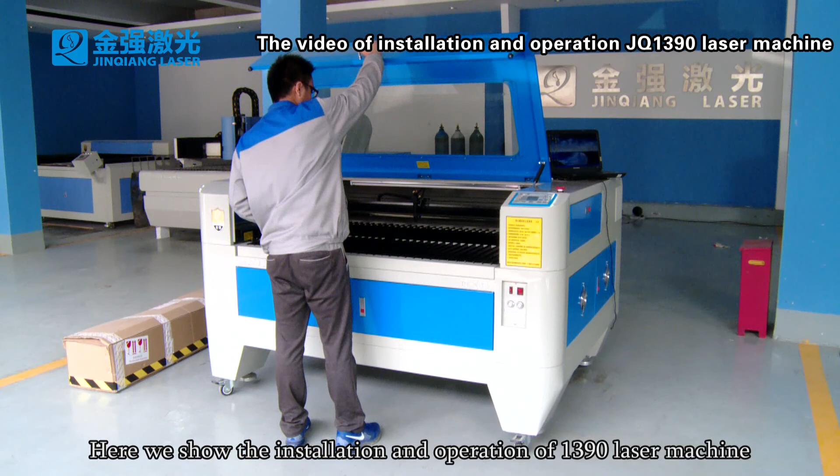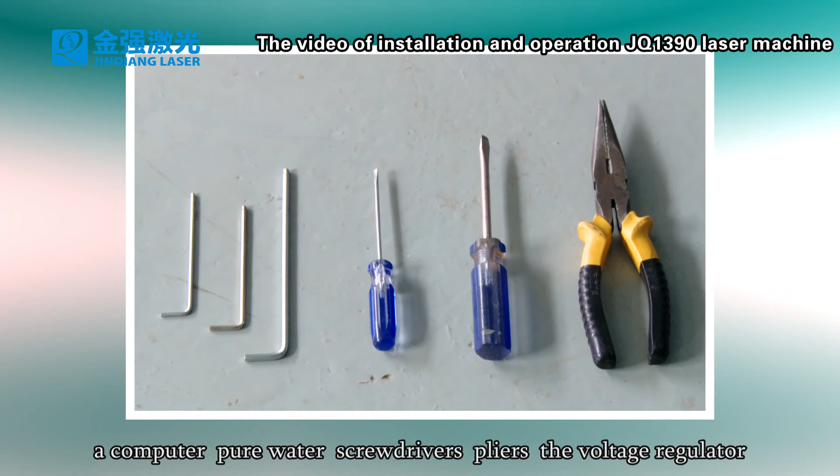1. Preparations before installation. Here we show the installation and operation of the 1390 laser machine. Before installation, we should prepare 220 volt, 110 volt power supply, a computer, pure water, screwdrivers, pliers, and the voltage regulator, in case the voltage is unstable or laser power is higher than 150 watt, suggest equipped.

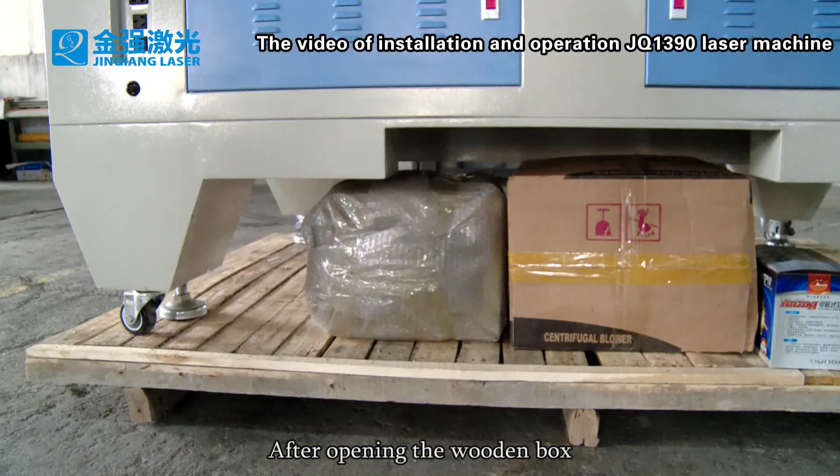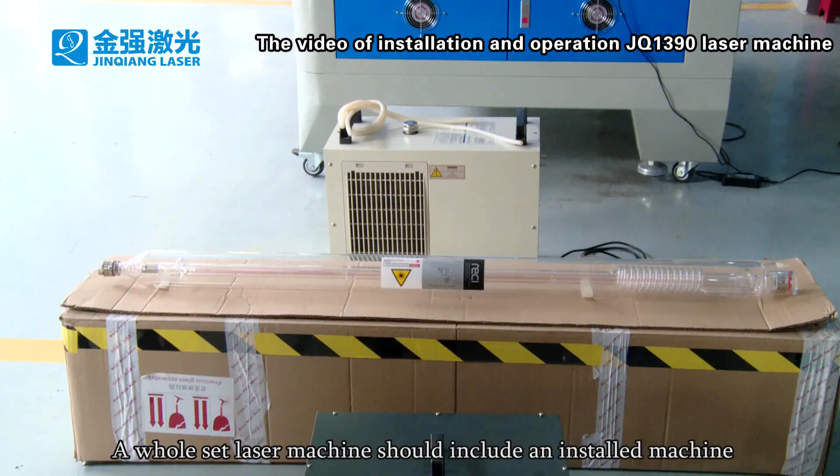2. Open the package and verify the machine accessories. Firstly, remove the outer wooden box, then tear down the machine's outside stretch film carefully. After opening the wooden box, find the related accessories and double check. A whole set laser machine should include an installed machine, laser tube, water chiller, air pumps, exhaust fans, toolbox, and file bag. After careful inspection, please contact our factory promptly if there is damage.

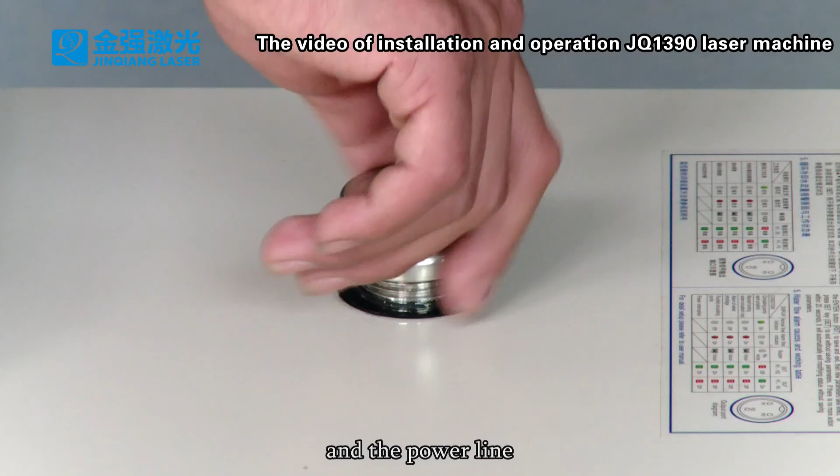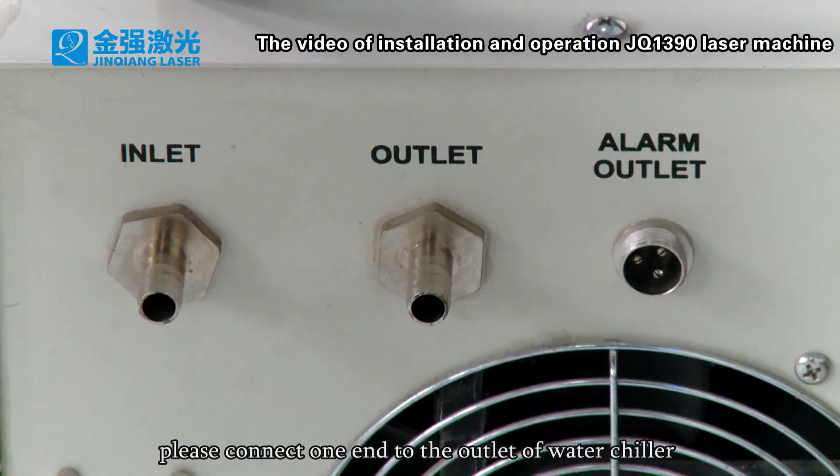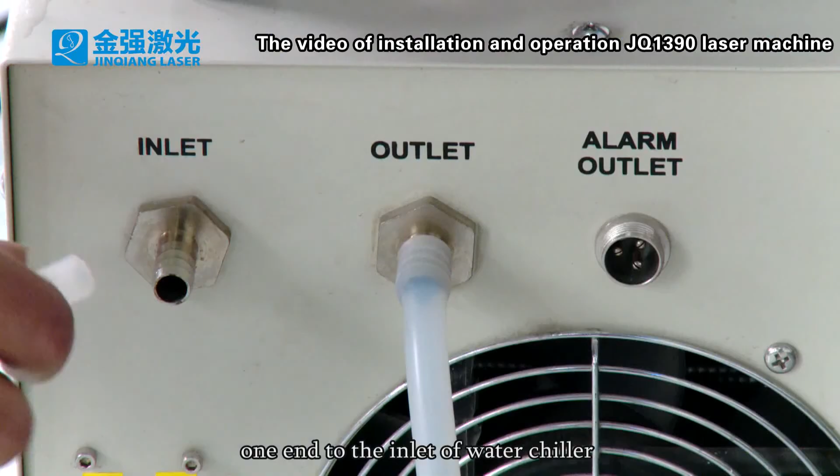3. Chiller installation. Firstly, find the water chiller, 2 water pipes, and the power line. Open the water injection cap of the water chiller to fill the pure water, then tighten the cap. Connect the water pipes: please connect one end to the outlet of water chiller and connect the other end to the inlet of machine. Then connect the other pipe, one end to the inlet of water chiller and the other end to outlet of the machine.

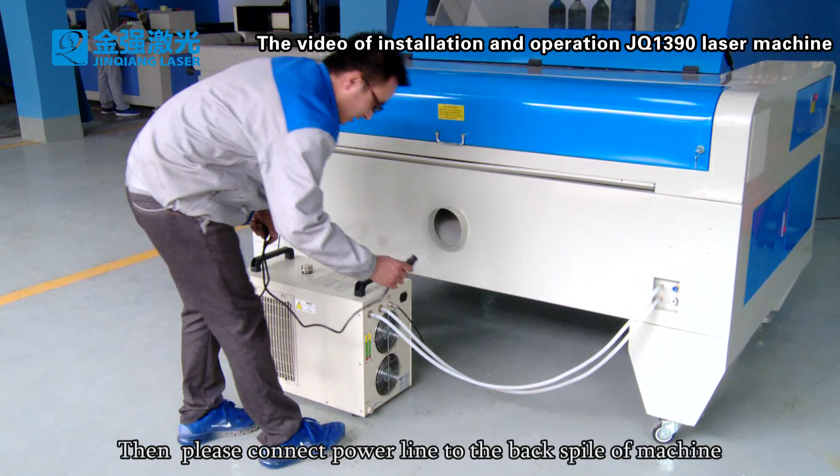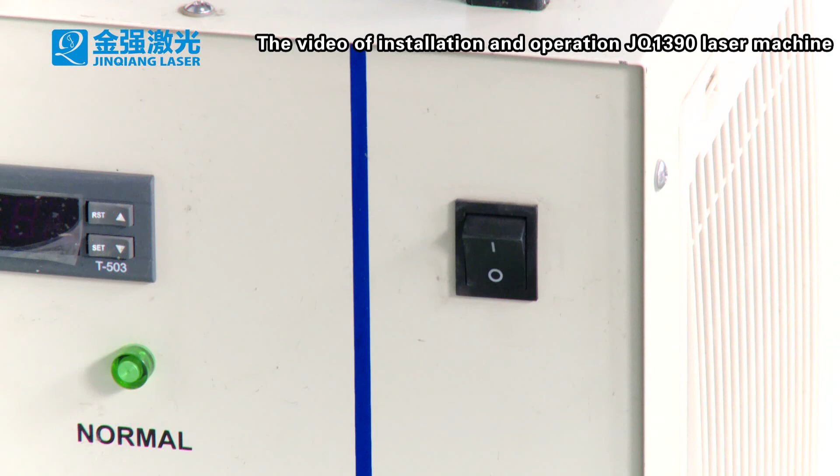Find the water protection line and put the right end to the connector of water chiller. Then please connect the power line to the back socket of machine. Make sure water chiller is off. Different machines use different water chillers; we also have the CW3000, CW6000 and others, all of them installed in the same way.

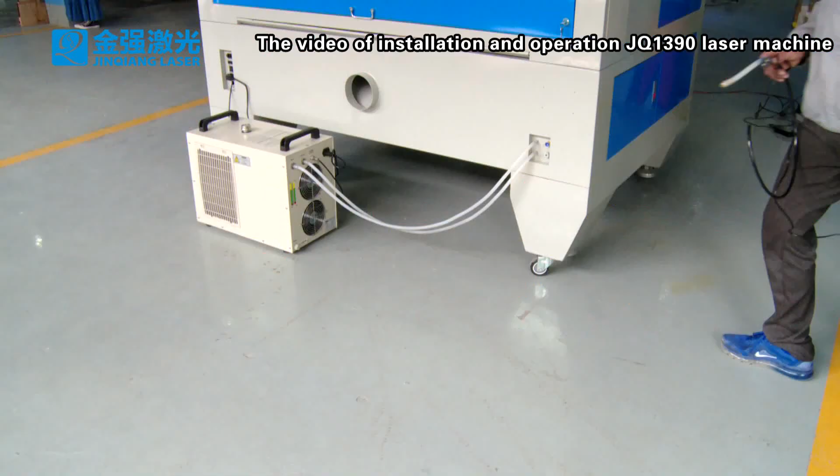4. Pump installation. Find the air pump, connect one end of air pipe to air pump and the other end to air inlet of machine. Then connect the power line of air pump to the back socket of machine.

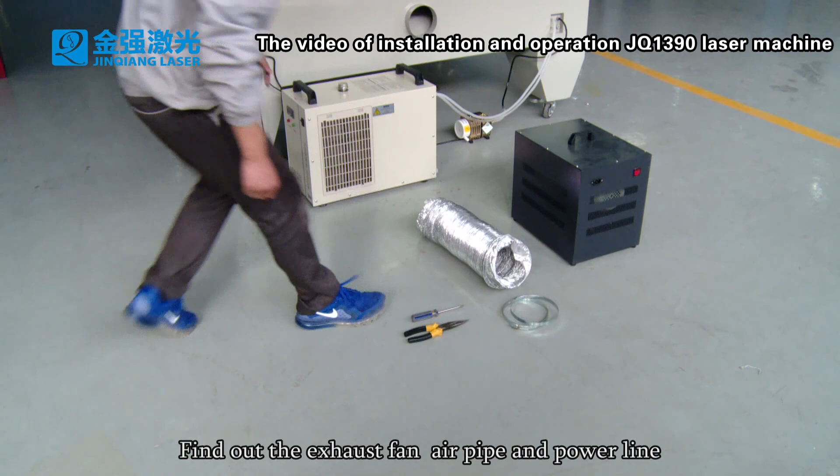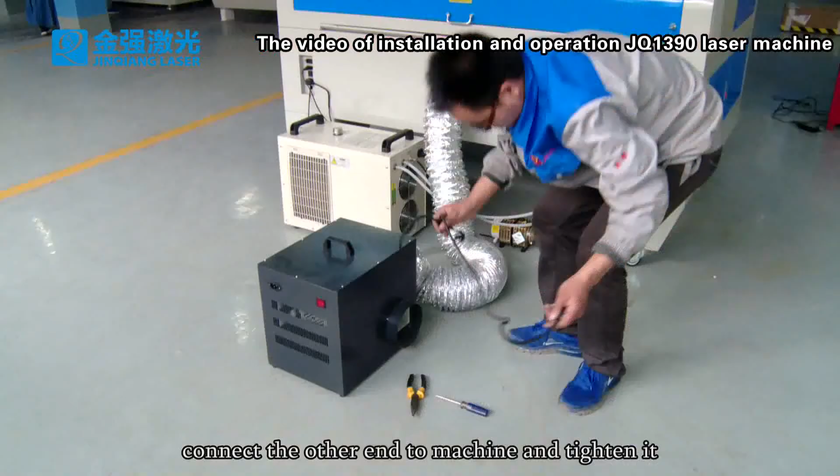5. Exhaust fan installation. Find the exhaust fan, air pipe and power line. Prepare pliers and a screwdriver with the plain end. When you get the air pipe and hoop, please clamp the hoop to the air pipe. Connect one end to the inlet of exhaust fan and tighten the hoop. Connect the other end to the machine and tighten it. Then connect the power line. Pay attention: please make sure the exhaust fan is closed after installation.

Different customers have different work tables. The connecting is as follows: blade work table, honeycomb work table, up-down work table.

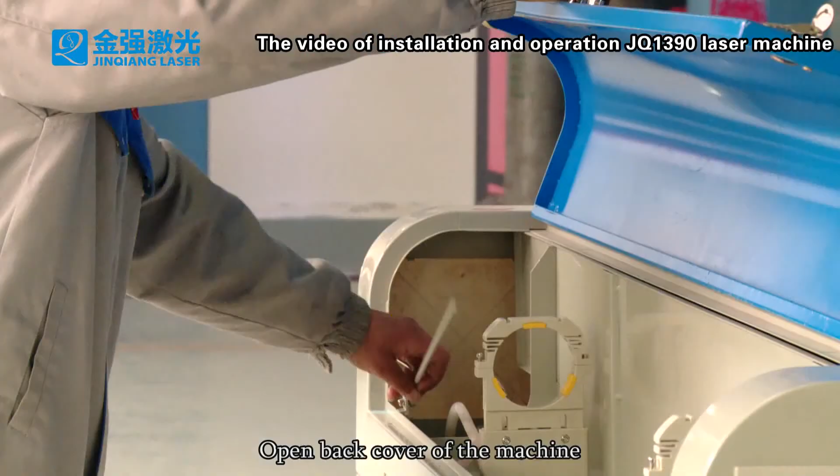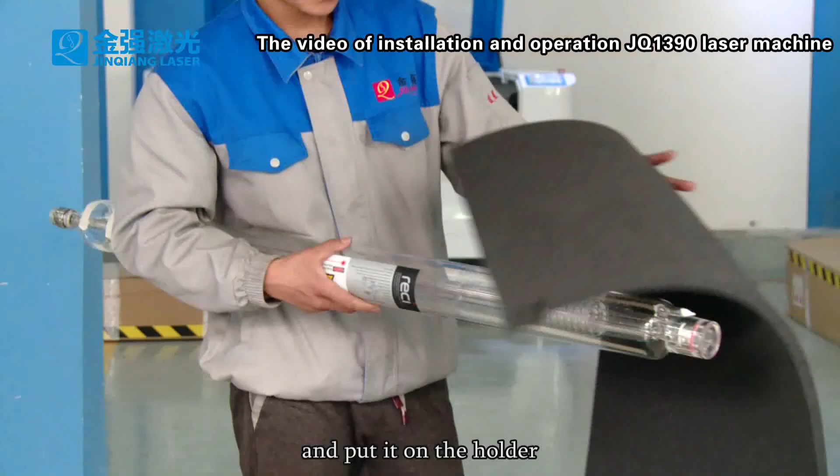6. Laser tube installation. Open the back cover of the machine and hold it up. Remove the screws on the laser tube holder. Take out the laser tube from the packing box and put it on the holder. During installation, we should ensure the distance between the laser outlet and the first reflecting mirror is 1 to 4 cm.

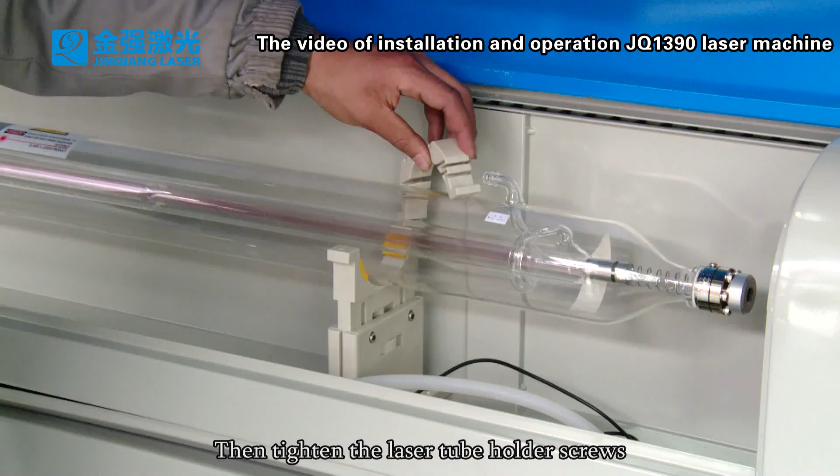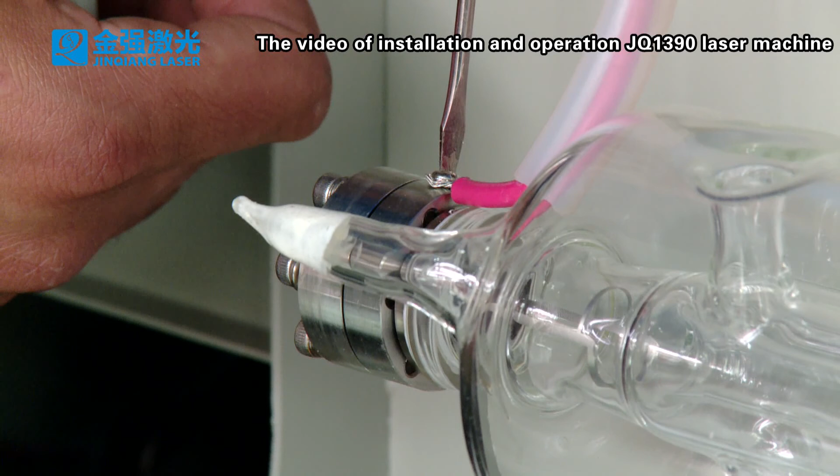The water outlet should be upturned. Then tighten the laser tube holder screws. Connect the laser tube inlet pipe and outlet pipe well. Take down the high voltage cap. Tighten the high voltage line and cover up the high voltage cap. Then connect the low voltage line and tighten again.

For other different models of laser tube, the installation is similar.

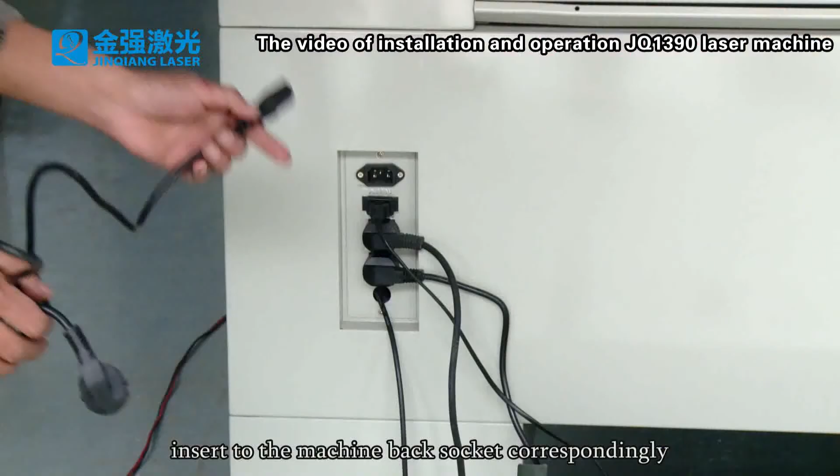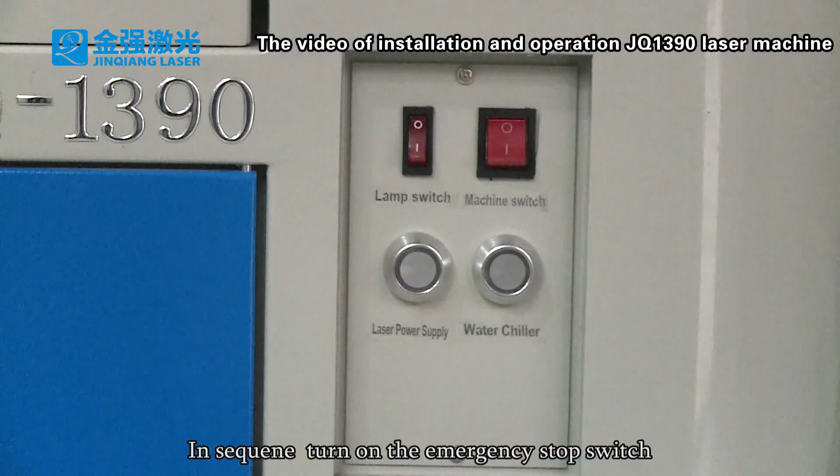7. Turn on the machine under precautions. Find the machine's power line and insert it to the machine's back socket correspondingly. Insert the power line plug into the power supply board to put through the power supply. In sequence, turn on the emergency stop switch, machine switch, and lamp switch.

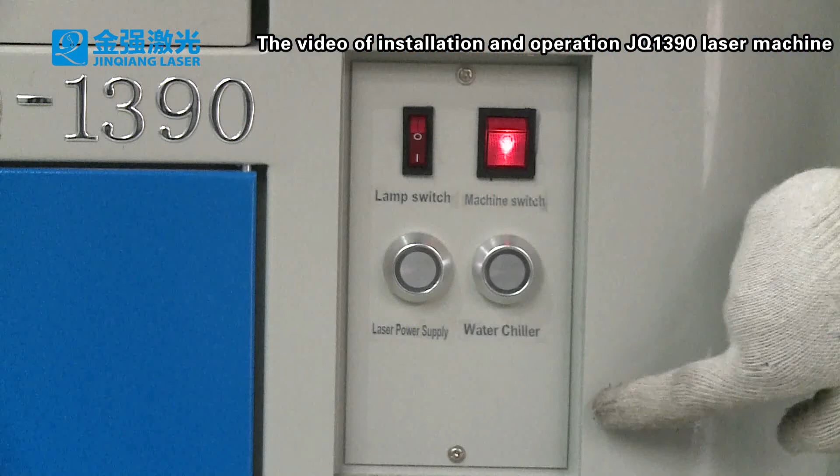Then turn on the water chiller switch. Open the laser tube's back cover to ensure water is circulating. When the laser tube is filled up with water, there will not be air bubbles inside. Finally, turn on the laser power supply switch.

8. The laser path adjustment. 1. Laser path adjustment requirements: the incident point of the laser on the reflect mirror locates within a 10 mm diameter range of the lens center. Approach the lens center as close as possible.

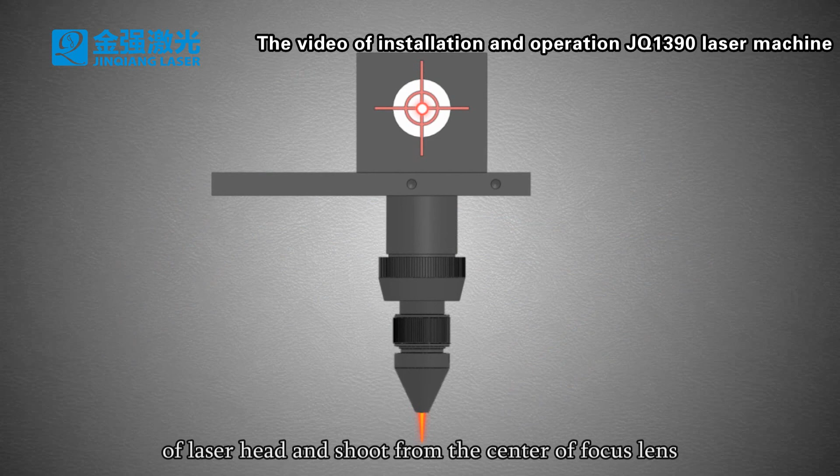2. When the laser head is on the 4 limit positions of the machine—top left corner, bottom left corner, bottom right corner, and top right corner—the laser beam can run into the round center of the laser head and shoot from the center of the focus lens.

Notice when adjusting laser path: don't put your body in the middle of the laser path to avoid laser burns.

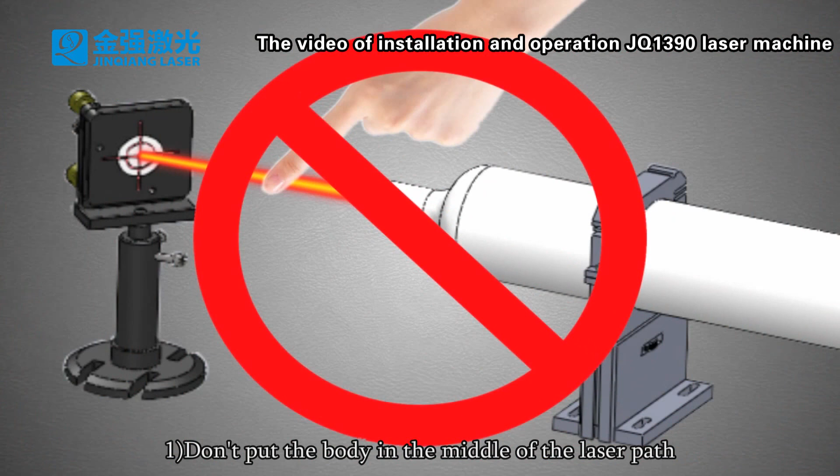Before adjustment, we must install the cooling water. It is forbidden to adjust the laser path when the cooling water is uninstalled or has poor circulation.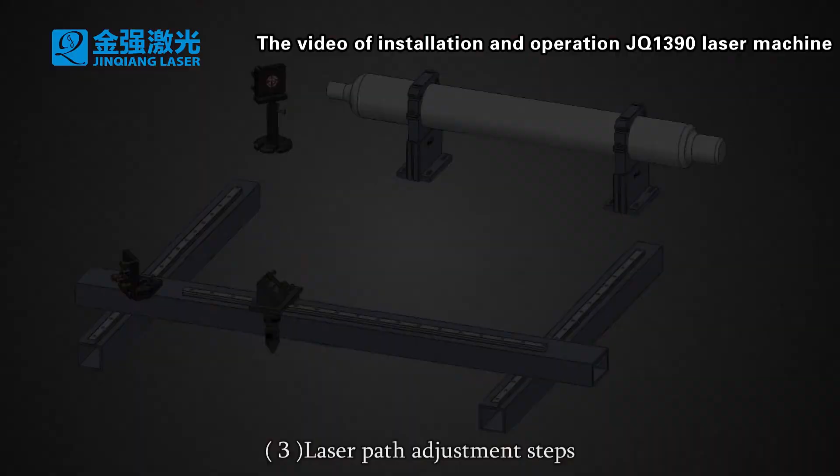Laser path adjustment steps: first, move the laser head to the top left corner of the machine. Prepare a piece of transparent acrylic and press the laser to test whether the laser shoots on the center of the first mirror and the second mirror within the range of 10mm diameter.

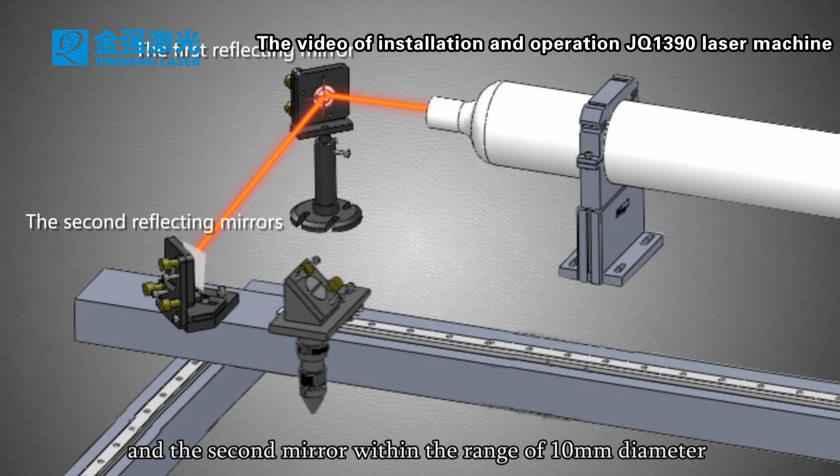Second, remove the third reflecting mirror and the focus lens cone to prevent lens contamination, and paste white double-sided adhesive tape on the third mirror position.

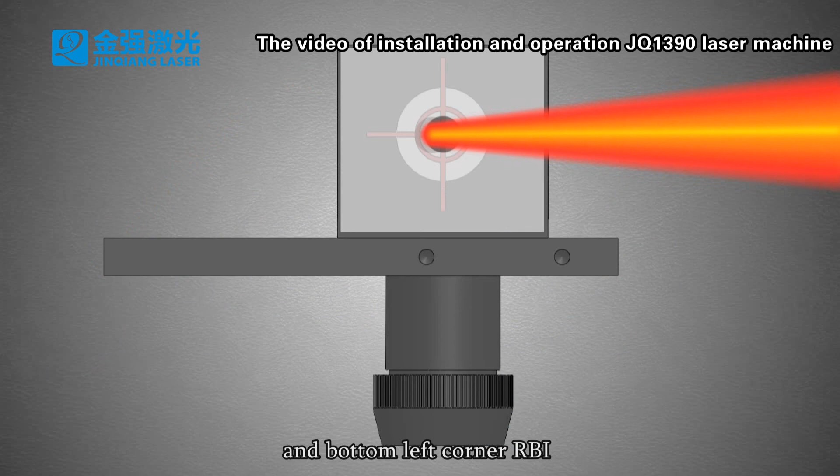Third, adjust the Y-axis laser path. Move the laser head to the top left corner and bottom left corner, RBI, and make the two points coincident. If they don't coincide, please adjust the first mirror by regulating the screws, repeating the above steps until coincident.

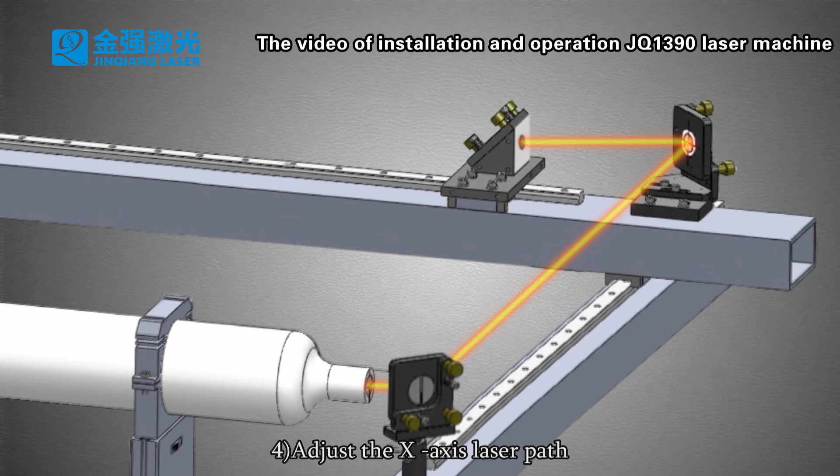Fourth, adjusting the X-axis laser path. Move the laser head to the bottom left corner and bottom right corner, RBI, and make the two points coincident. If they don't coincide, please adjust the second mirror by regulating the screws, repeating the above steps until coincident.

Fifth, make sure the top left and bottom right corners are in coincidence, then adjust the laser head to the center.

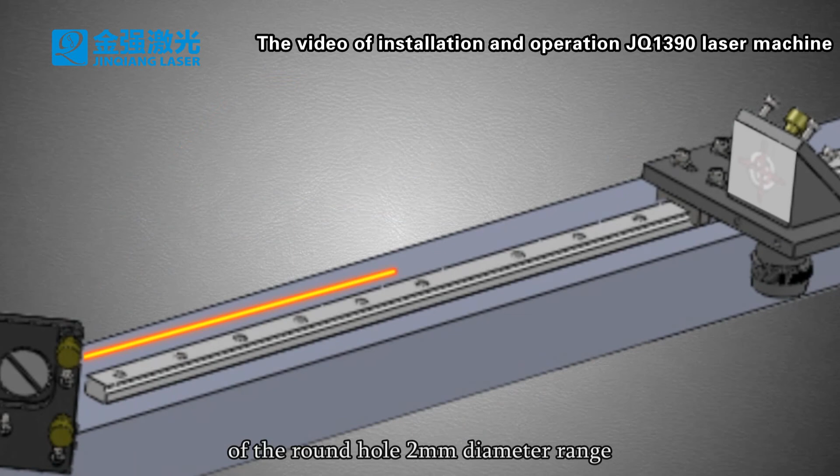Sixth, move the laser head to the top left corner of the machine and press the laser. Make sure the laser spot is located in the center of the round hole within a 2mm diameter range, approaching the center as close as possible. If it is not in the center, adjust upper and lower deviation, and left and right deviation.

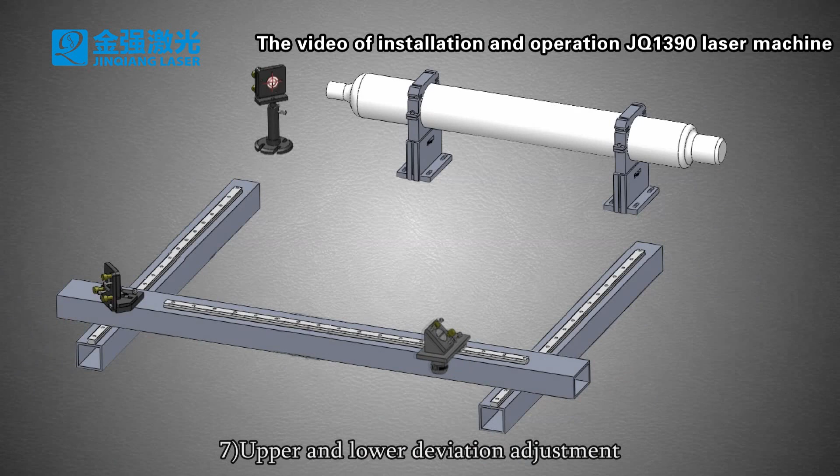Seventh, upper and lower deviation adjustment. If the laser spot has upper or lower deviation, please lower or raise the laser tube by adjusting the front bracket with the knob. Clockwise is for upper, counterclockwise is for lower, until reaching the center. Then repeat steps 3 and 4 to make sure the laser spot coincides, and repeat steps 6 and 7 until the laser spot is in the center.

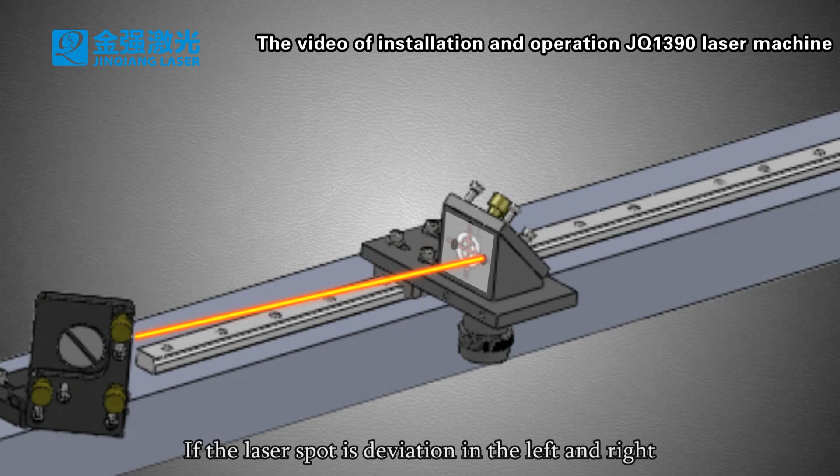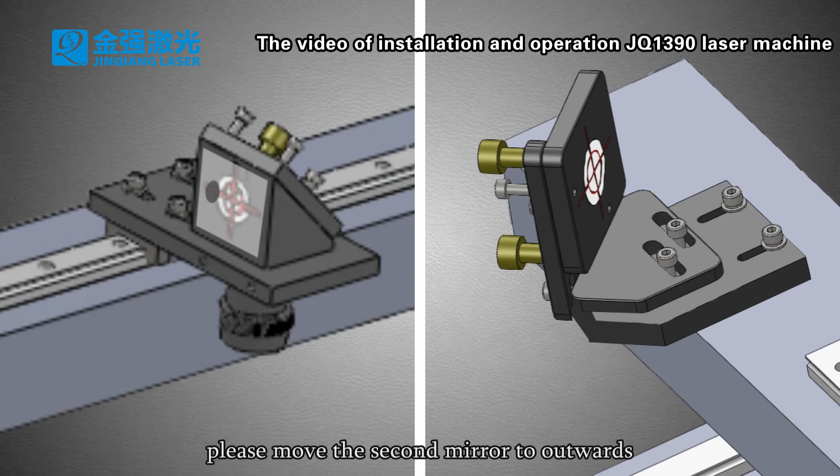Eighth, left and right deviation adjustment. If the laser spot deviates left or right, move the second mirror frame outwards or inwards. If the laser spot is left of center, move the second mirror outwards; if right of center, move it inwards. Then repeat step 4 to let the X-axis point coincide with the laser spot, and repeat step 8, repeating steps 4 and 8 until the laser spot is completely in the center of the hole.

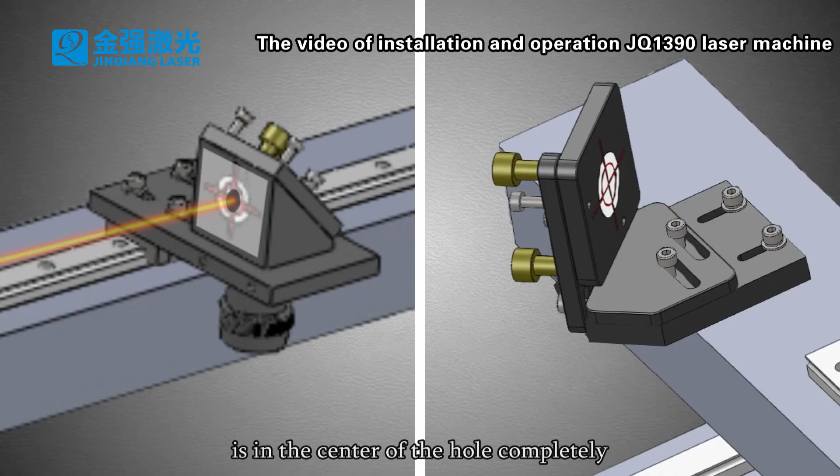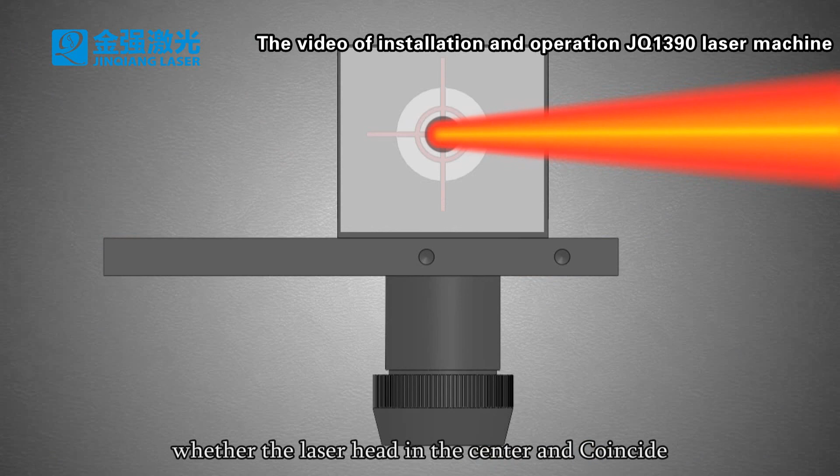Ninth, finally verify the laser head at the top left corner, bottom left corner, bottom right corner, and top right corner, checking whether the laser head is in the center and coincides. If not, repeat the above steps.

Tenth, install the third mirror and focus lens horn. Adjust the laser outlet center position with the double-sided adhesive tape, press the laser to get a spot, and let the laser spot come out from the nozzle. If it's not in the center, adjust the third mirror using the screws until the spot shoots from the center of the nozzle.

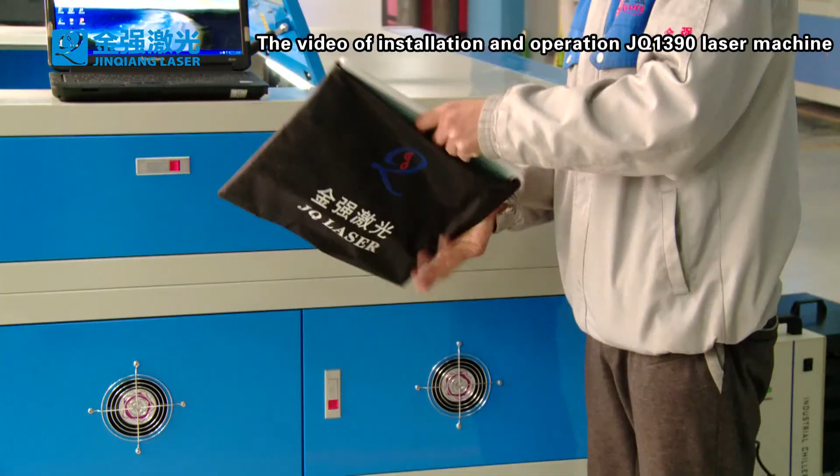Machine software installation and download. Test it by finding the data cable from the file bag, then connect the computer and the machine together.

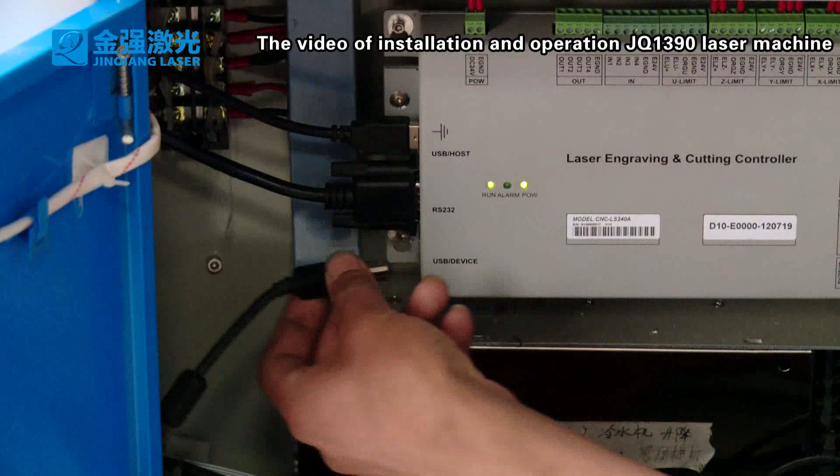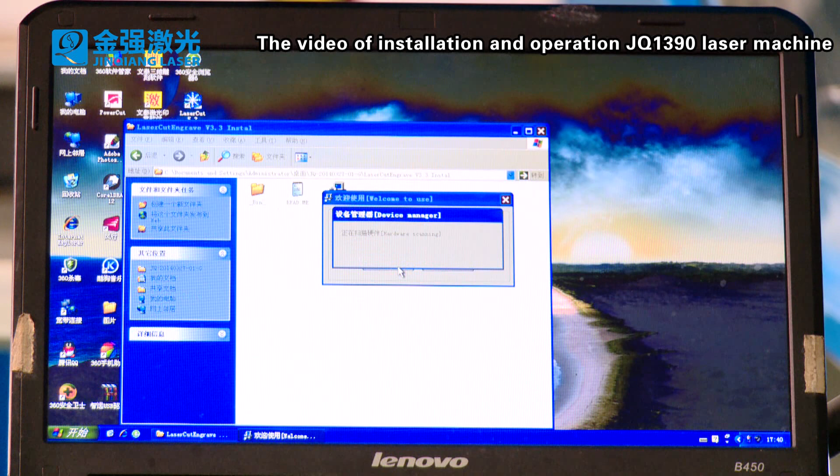Find the CD and put it into the computer's CD-ROM drive. Copy the software to your computer, open the software installation program and install it, then open the software using the desktop icon after installation.

Draw a simple square, set up the parameters, then choose and download. If you hear the voice 'D' from the machine panel, that means the machine was connected well.

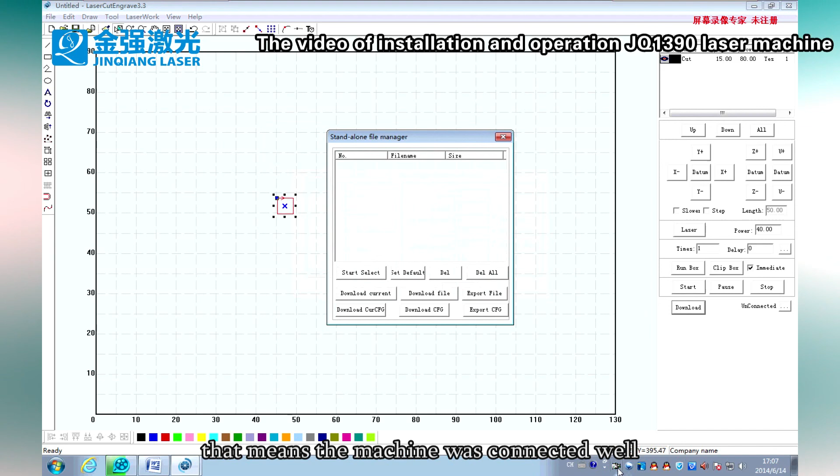A detailed introduction of the laser software is on the CD-ROM. Please read it carefully.

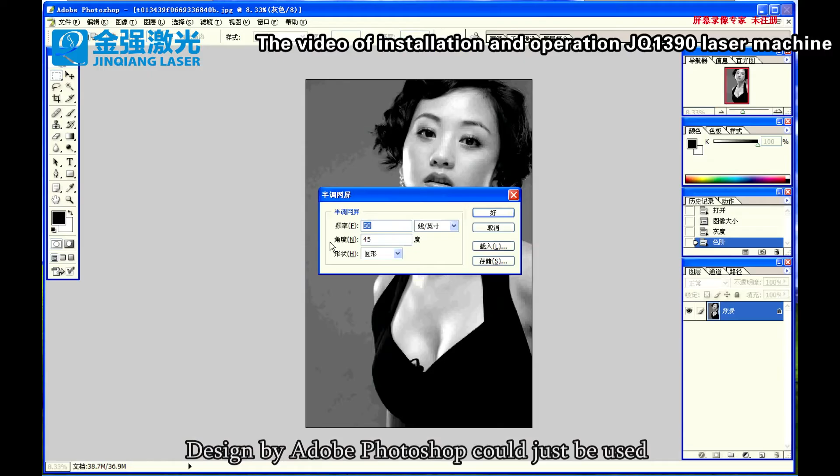Attached software using: mainly used design software includes CAD, ArtCAD, Adobe Photoshop, CorelDRAW, and Adobe Illustrator. Designs made in Adobe Photoshop can only be used for engraving patterns, while the others can be used for engraving and cutting patterns.

Now let's take CAD as an example. Draw a simple figure in CAD and save it in DXF format.

Open the laser machine software and import the saved figure. You will be prompted to merge connected lines, so fill in the combined tolerances. Make the figure close, then set the parameters for cutting or engraving.

Then download to the machine and process. If you use other software requiring different operations, please read the operation manual.

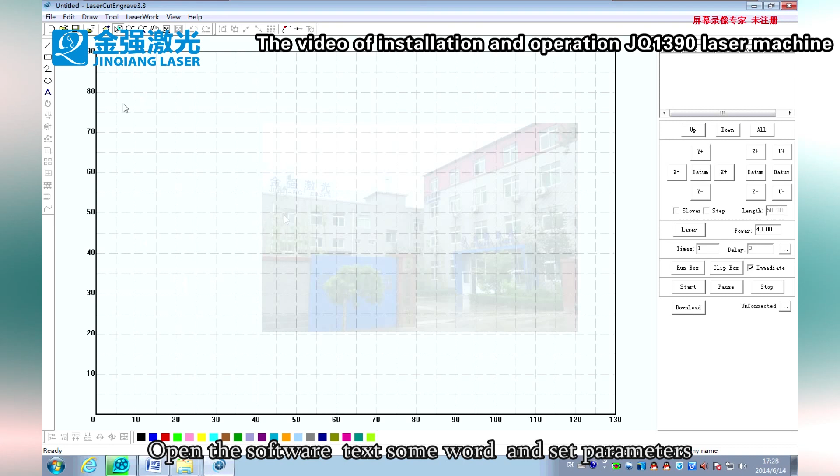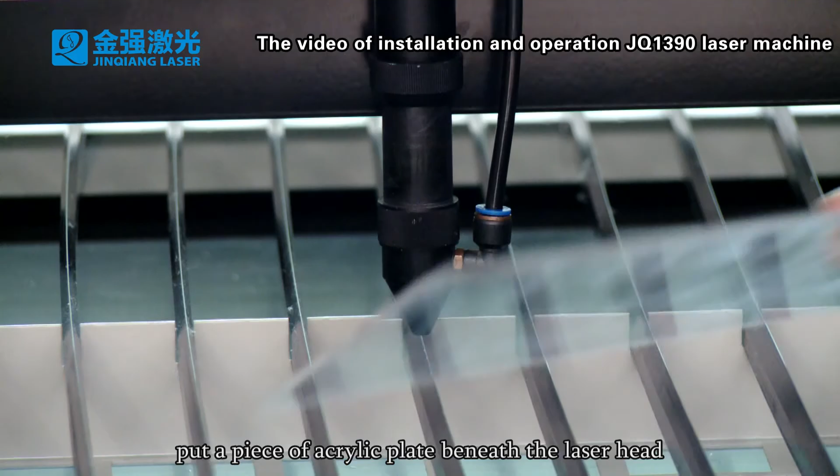Cutting and engraving functions: open the software, type some words, and set parameters. Put a piece of acrylic plate beneath the laser head, adjust the standard focal length, then start to engrave.

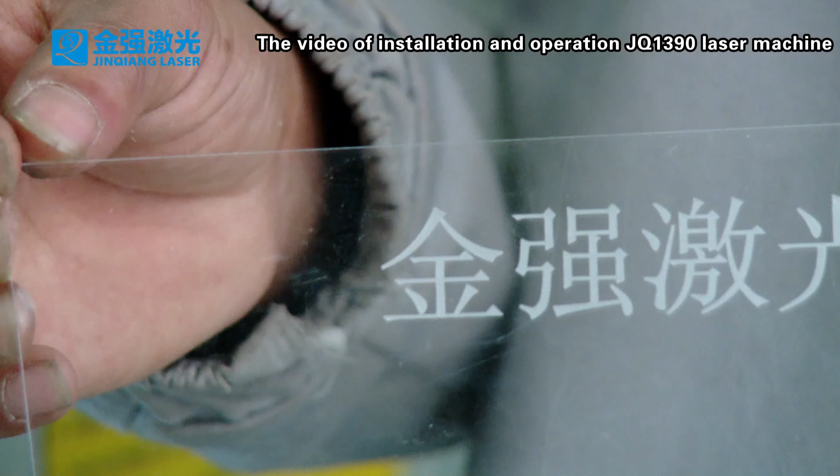Cutting operation is the same. Use the software to set the cut figure, then put an acrylic plate to the laser head to see the effect. Shape cutting is also perfect.

Machine control panel functions and using. Buttons on the machine's work panel have different functions. First, you can press the reset button to reset the machine.

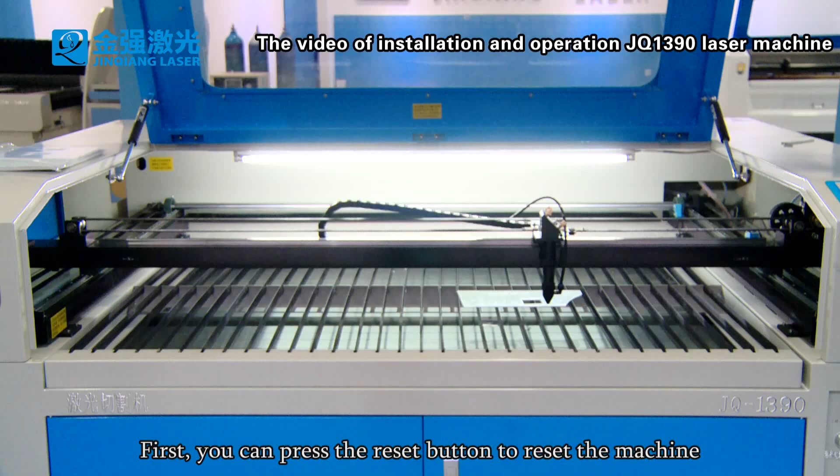Then press the upper and lower, left and right direction buttons to adjust the position of the laser head. Press the locating key to locate, and press the test button to test. If there's no problem, you can press the start button to run.

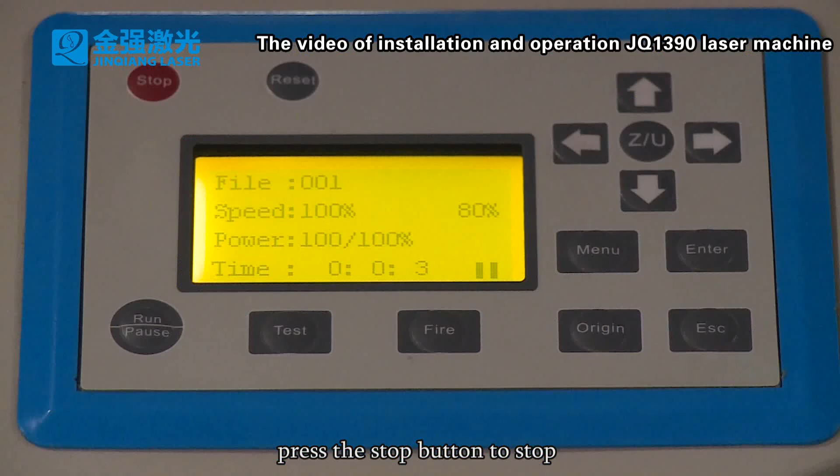When running, you can press the pause button to pause, and press the stop button to stop. If the machine has unforeseen circumstances, you can press the emergency stop switch to power off the machine.

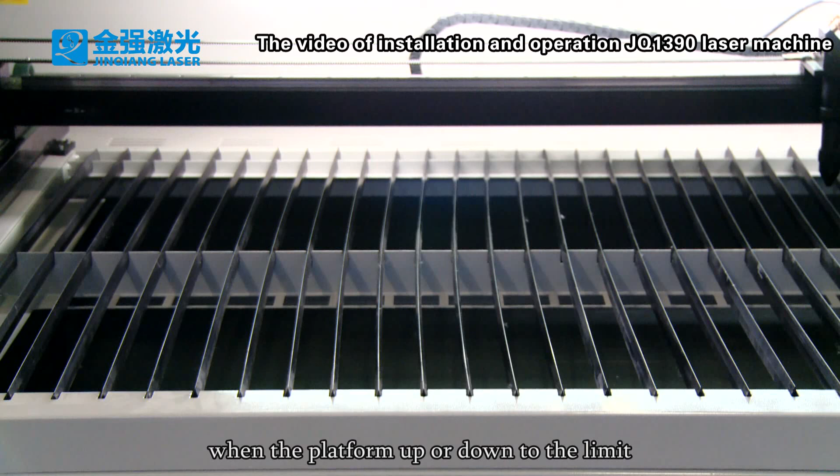By pressing the Z and U keys on the front panel, you can convert up and down work platforms. Press the up and down arrow keys to make the platform go up or down. When the platform reaches the limit, it will automatically stop.

There are two types of downloading: online downloading and offline downloading with a USB disk. USB disk downloading operates as follows. For some figures, you can draw with your computer and also click to download. Save the output path to the U disk.

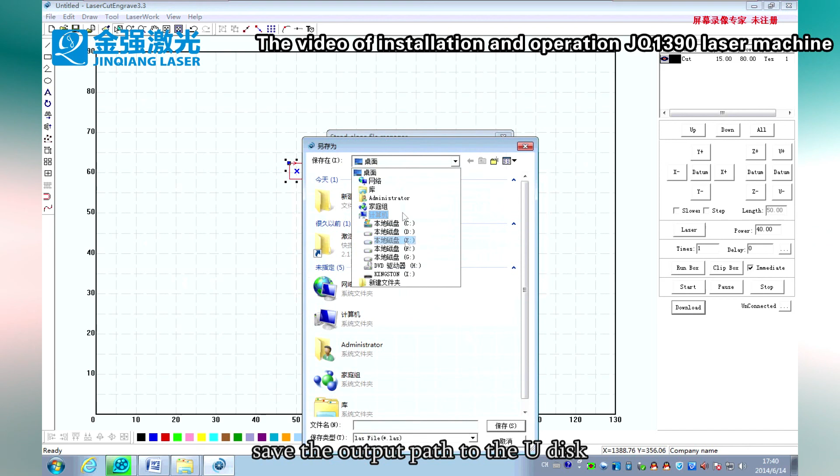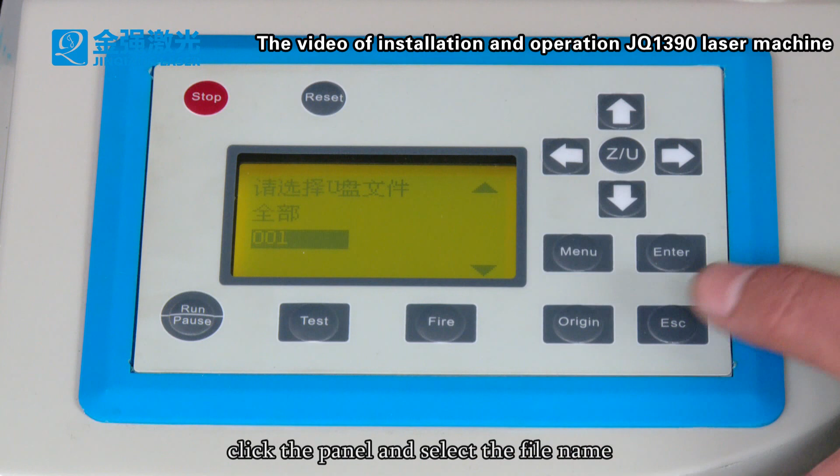Insert the USB disk into the machine's USB interface. Click the panel and select the file name, press Enter, and the files will be saved on the panel. Then unplug the USB disk and click the panel to start processing.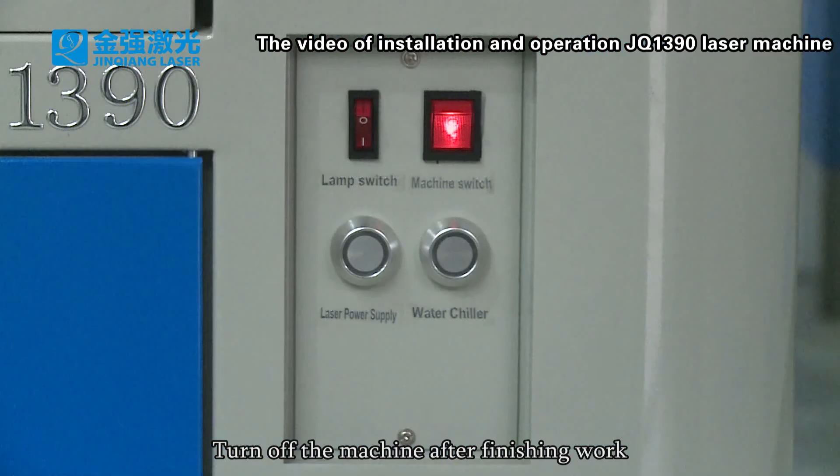Turn off the machine and precautions. Turn off the machine after finishing work. Turn off the laser power switch, water chiller switch, lamp switch, machine switch, and the emergency switch in sequence. Close the machine cover and disconnect the machine's main power to stay safe.

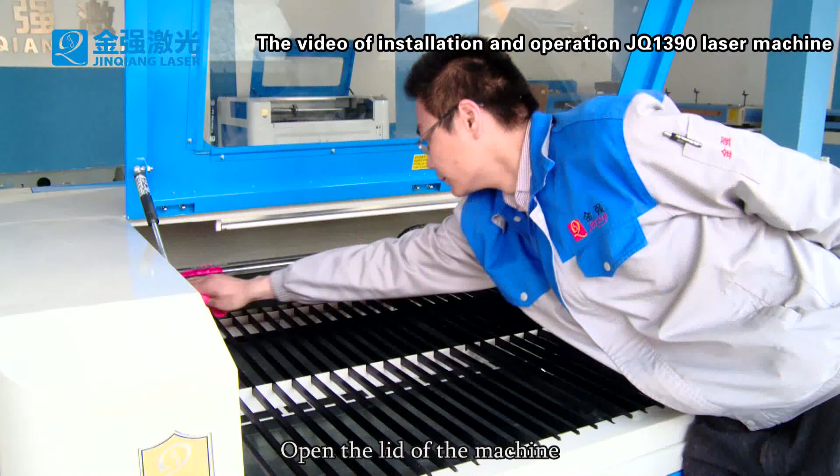Maintenance and precautions. Regular maintenance of the machine is needed. Open the lid of the machine and wipe off the dust on the rail with a clean rag.

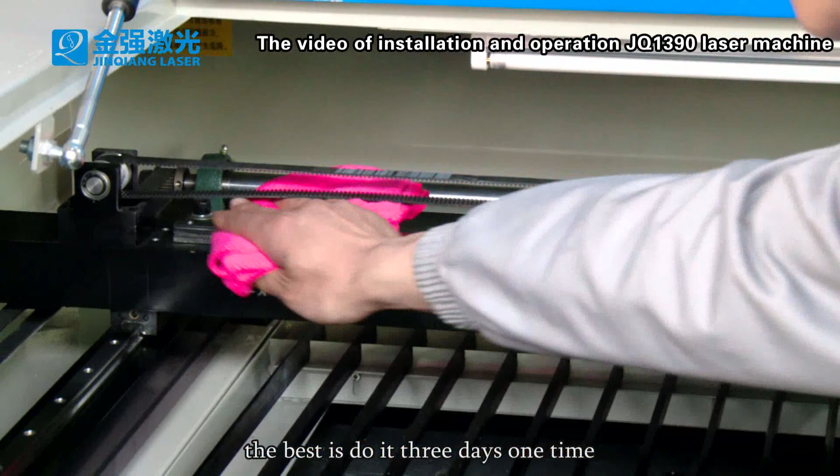Then pour machine oil on a clean cloth and wipe it again. It's best to do this once every 3 days.

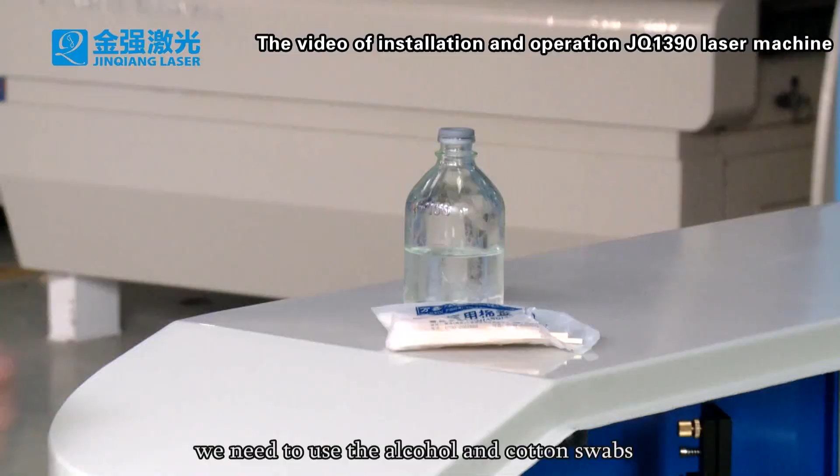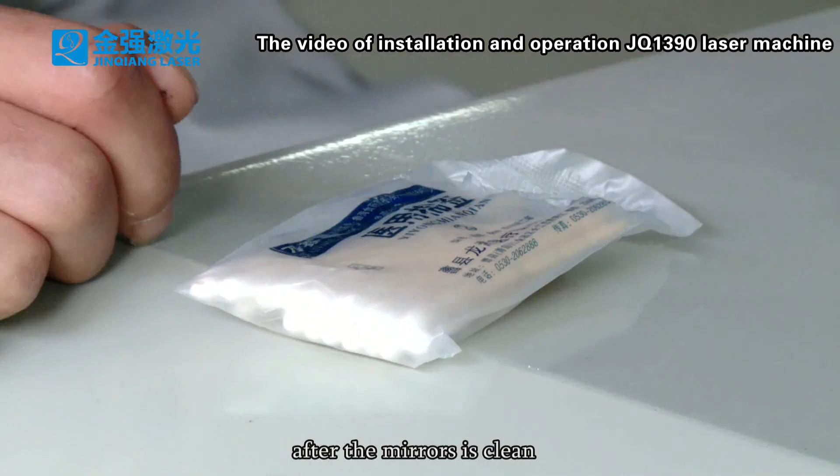Also, irregular maintenance is needed for the 3 reflective mirrors. Because of the particularity of the mirrors, we need to use cotton swabs. First, wipe off the dirt on the mirrors carefully with a cotton swab moistened with alcohol. After the mirrors are clean, suck up the residual alcohol with a dry cotton swab.

Before we clean the focus lens, we need to carefully open the lens cone with the cone tool.

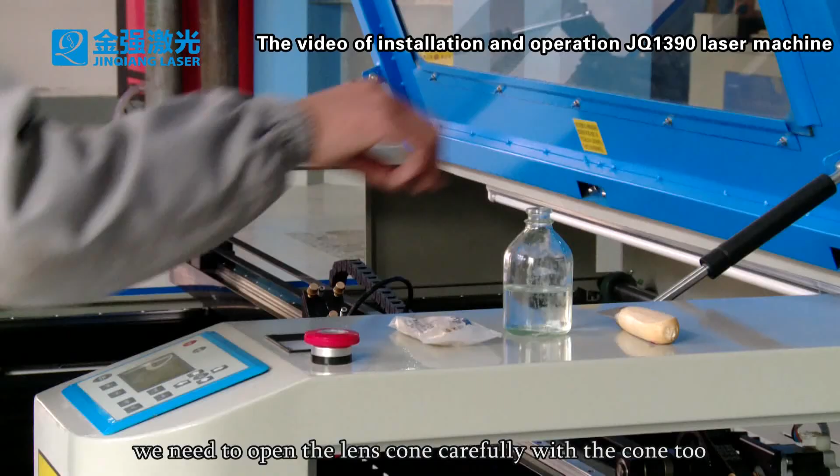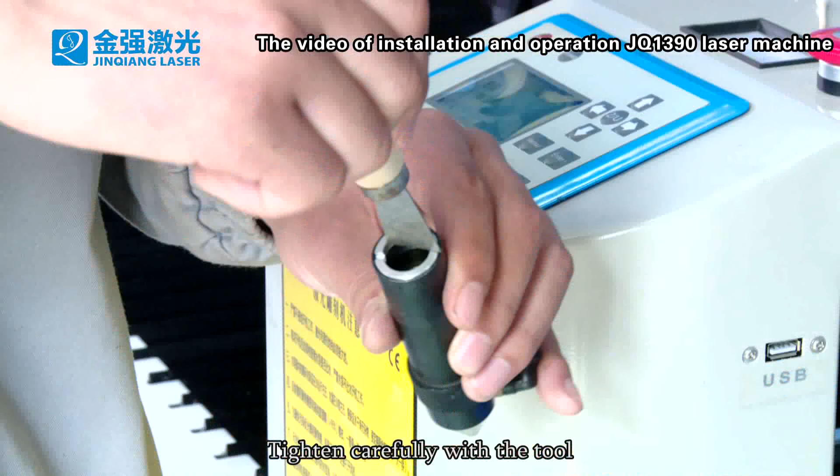After finishing the lens maintenance, we need to put the lens into the cone. Make sure the flat or convex surface faces upward in the cone, then put it carefully into the cone. Tighten carefully with the tool, shaking the cone lightly. It will be okay if the lens is not shaking in the cone, then tighten it onto the laser head. Lens maintenance should be done once a day. Close the lid of the machine after maintenance.

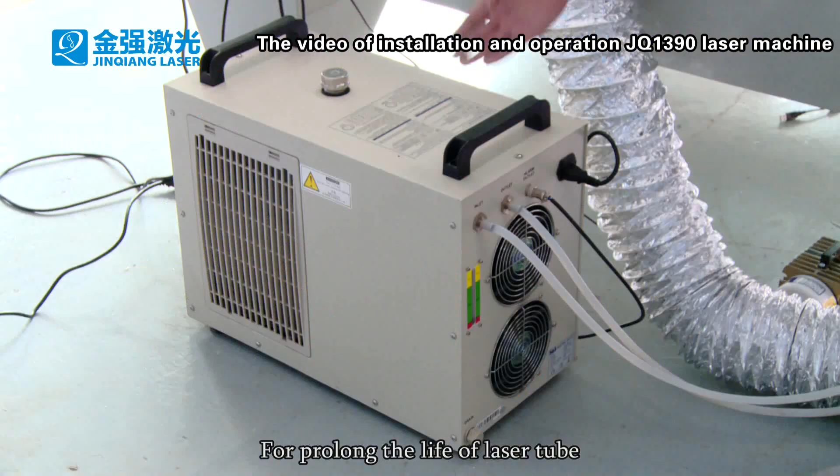For prolonged life of the laser tube, the cooling water in the chiller should be changed regularly. Open the drainage switch of the chiller and drain out the water, then refill the chiller with pure water. It should be replaced once every 7 days.

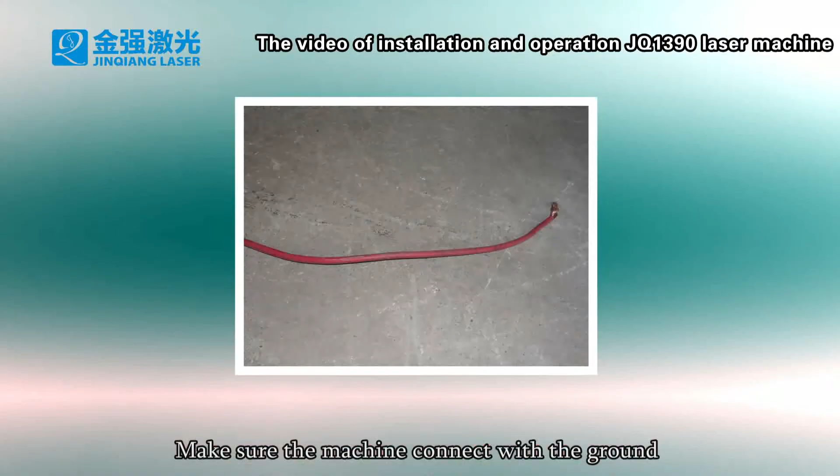When not using the machine for a long time, or during freezing winter conditions, make sure to drain the water from the chiller and laser tube. Make sure the machine is connected with the ground: one end connects to the machine ground wire interface, and the other end connects to outdoor moist soil.

The installation and instructions of the 1390 laser machine were covered here. Hope you understand it well. Finally, we wish everything is good for you.